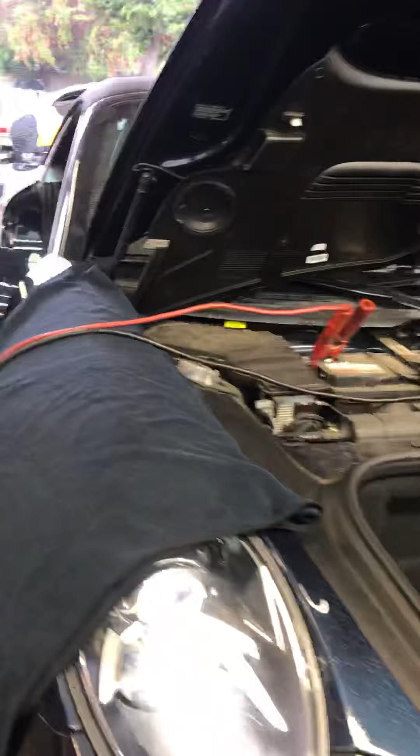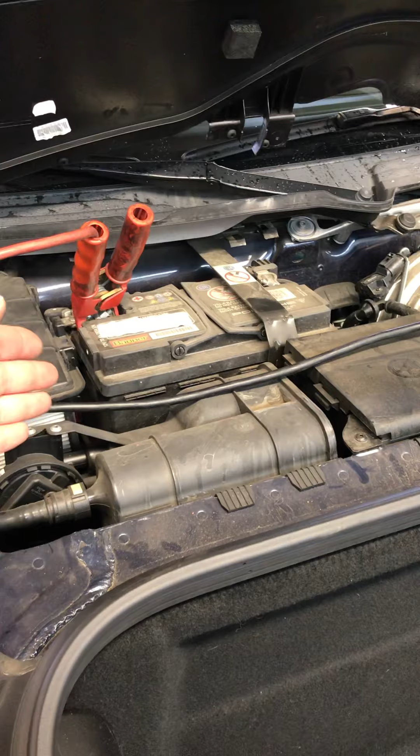We've got an interesting situation today where we have a 2014 991 and we have a check engine light. So the first thing we did is connected the power supply. This is not a battery charger, this is a power supply. And normally I don't worry about connecting it straight to the battery. Porsche says not to on the ground side, so we didn't, but honestly it's not a terrible thing as long

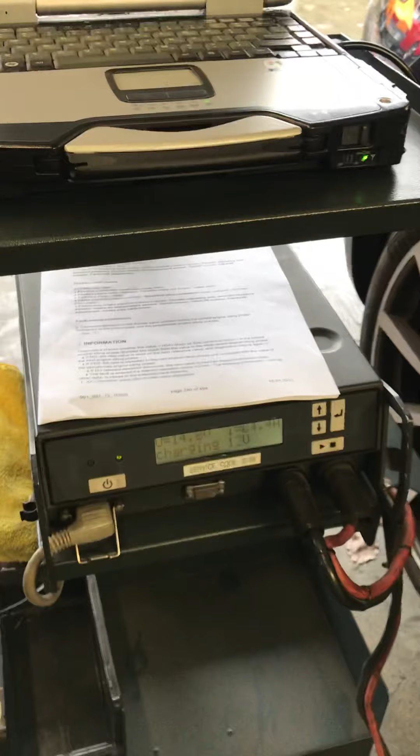as you're careful. We've got our PIWIS 2 connected, and again, the power supply is there because we don't want to put too much AC voltage into the charging system, because computers hate AC voltage. They run off DC voltage. We've got our PIWIS 2 connected and it's going through a vehicle communication interface. Right now you can see that there's no USB light, meaning there's no communication light, but we're going to do that here in a second.

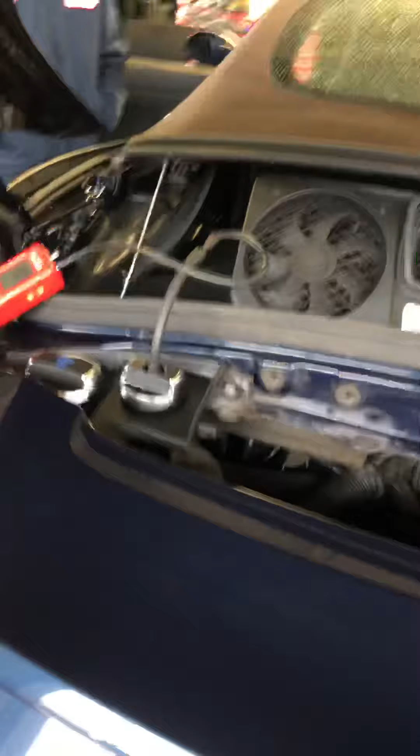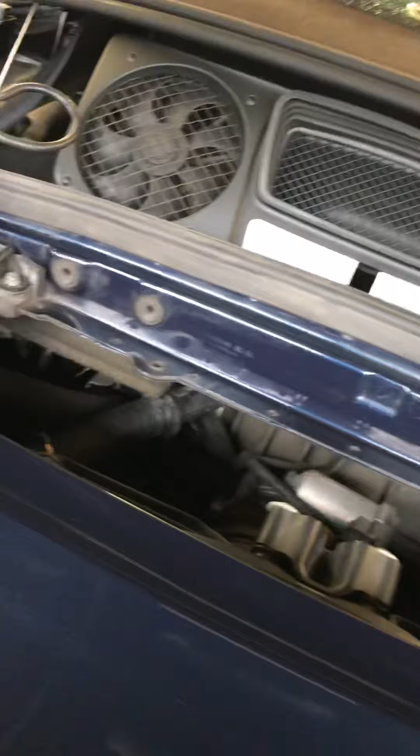There's our standard battery charger. We don't want to use one of those, not clean enough voltage. And I also have a manometer connected, so we're reading the crankcase vacuum. It's actually low, and I think that's part of our problem here. We're going to also check the purge valve, or what's known as the tank vent valve.

So I'm going to go ahead and scan the vehicle. We're going to go into 911. We're going to 991 because this is a 991, and it's going to communicate, and eventually if it's communicating we will get the USB light, there it goes, to come on. If you don't get that USB light, there's no communication. On the 12 through 15 cars, your connection, your DLC, is right at the fuse panel. So now we're connected to the car.

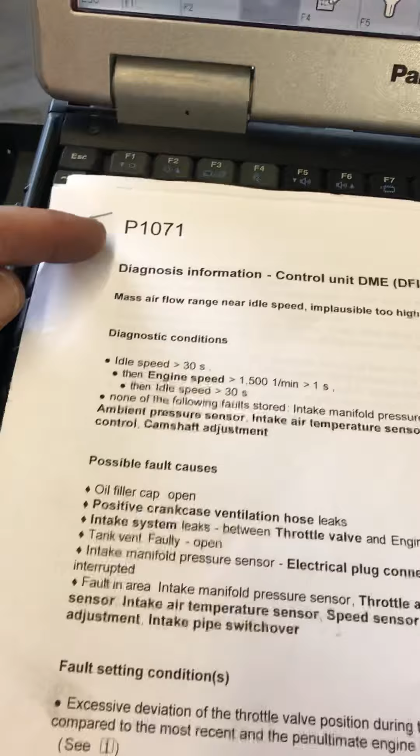I'm going to go in, since we had a check engine light and I reset it yesterday, but I wanted to show you what we were doing. Now, when we have a check engine light or a fault, I like to pull up the guided fault finding data, and that gives us the fault, what the diagnostic conditions are, meaning what it takes to have that fault happen,

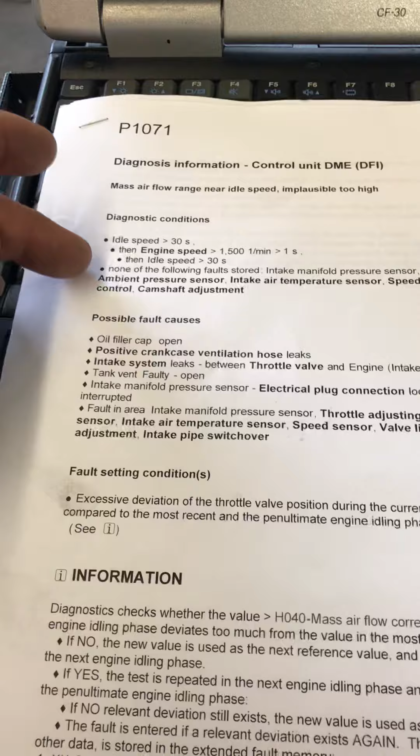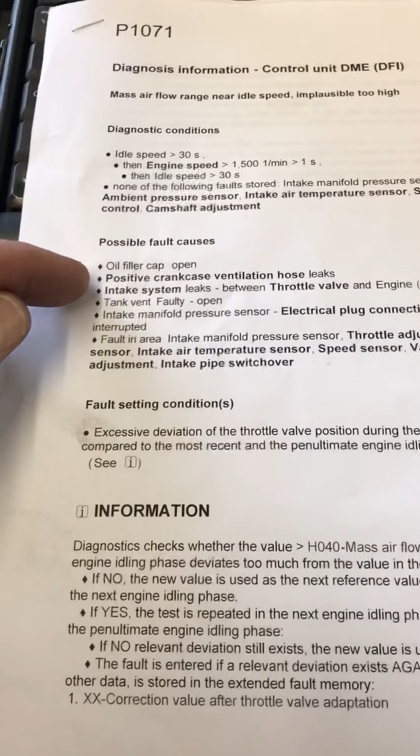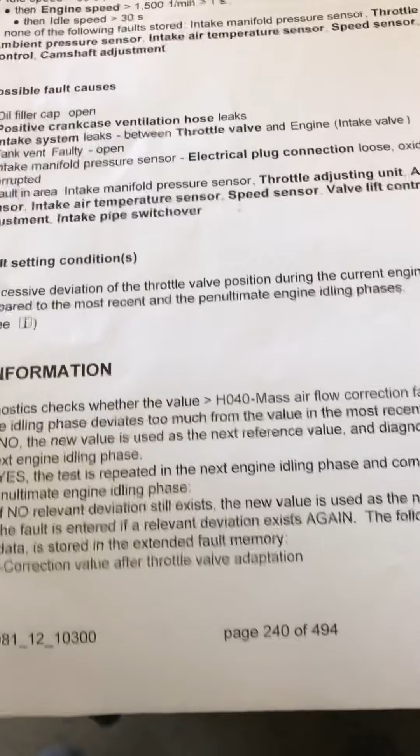then possible fault causes, whether it's the oil filler cap being off, a positive crankcase ventilation leak, which we may have since we have 11 instead of 15 or 16, intake leaks, something going on with the pressure sensor, a fault in the intake manifold pressure sensor, etc. And we don't have any other faults other than this one mainly.

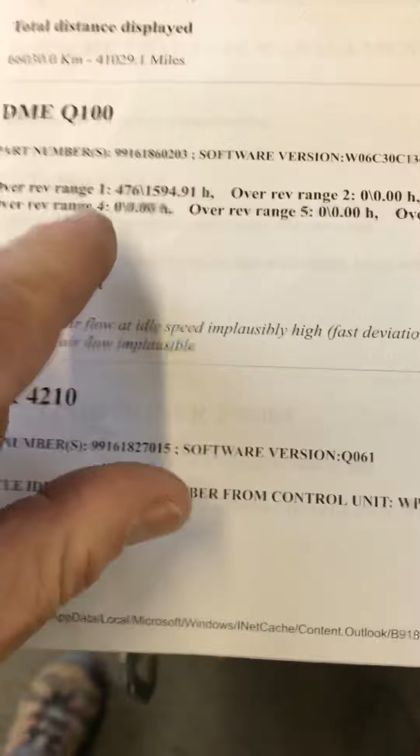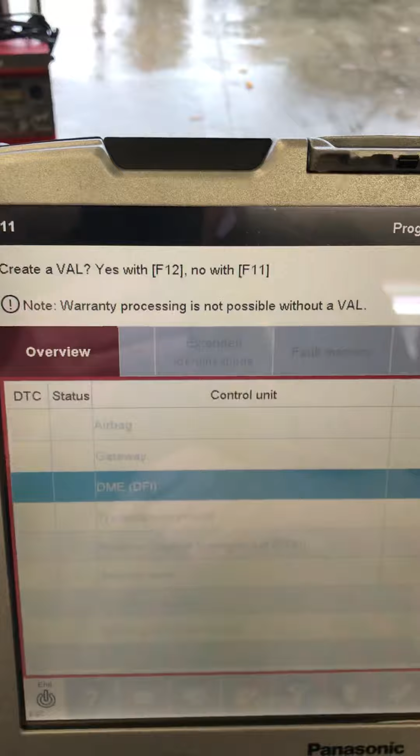Now I'm going to go ahead and go in to DME. I'm going to hit continue, and we don't want to create a vehicle analysis log because that would be about 100 pages and we don't want to wait on the video for 20 minutes. I'm going to go ahead and check our tank vent valve here in a minute. Look, there are campaigns stored for this vehicle. I'm not going to worry about that right now. That would have to go to a dealer to take care of that.

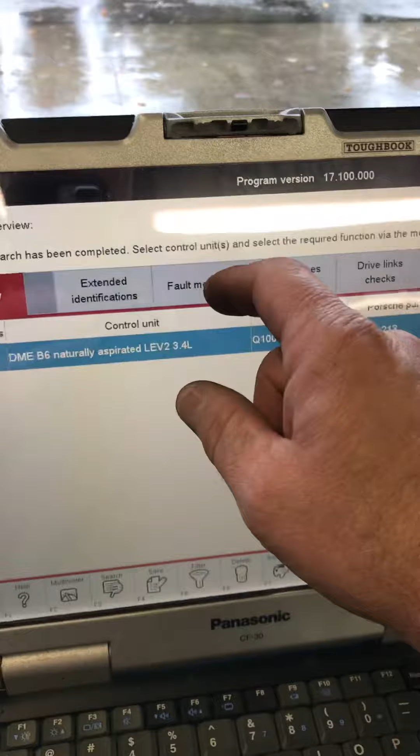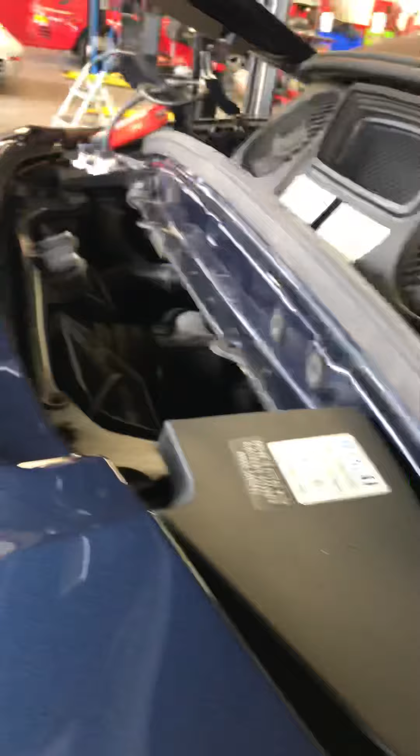And you see what we have now. I've cleared the fault memory, so we shouldn't have any faults at this time. Oh, purge fan. Well, the reason why we have the engine compartment fan is because I have those out of position and unplugged. So, okay, that makes sense. We won't worry about that at this time, but we'll go into actual values and look at some values.

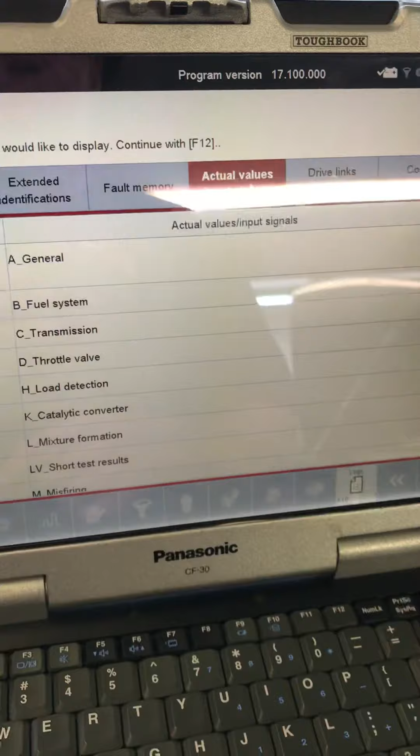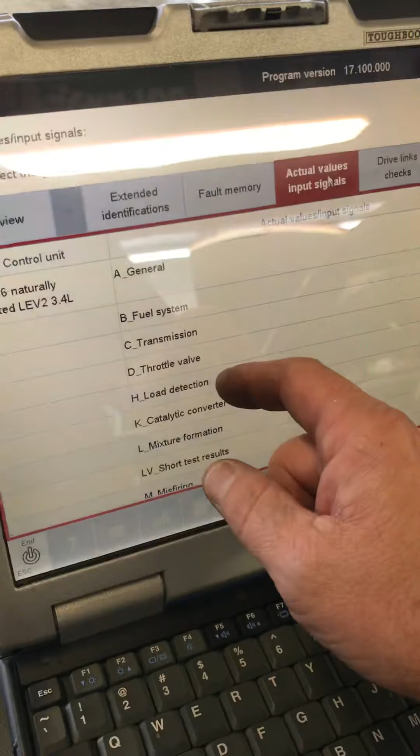So mainly when you're dealing with the intake system and the throttle body, I would say to always go to load detection, H, and in H, actually there's a TI, a technical service bulletin from Porsche, to tell you about this issue and the actual values and where to look and what they mean. So we normally look for H040.

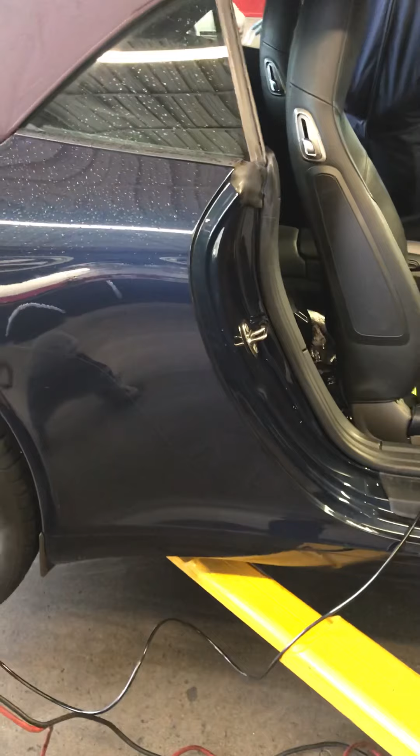So we're going to go in there, we're going to hit continue, and we're going to mainly focus on H040, because that's really the atmosphere in the intake. Now, what they did in the 2012 car, unlike the Panamera, and let me just give you a little correlation first. The Panamera, which came out in 2010, had Smart Key 1. That was a change. The 2011 Cayenne, the 92A, the Smart Key 1. And then the 2012 911, like we're dealing with here. And those cars are different.

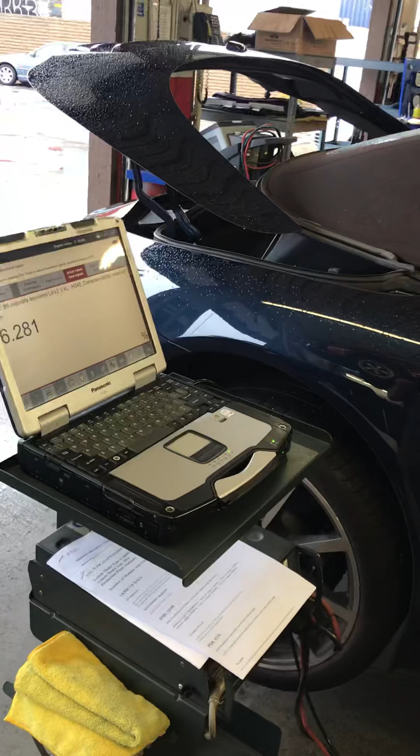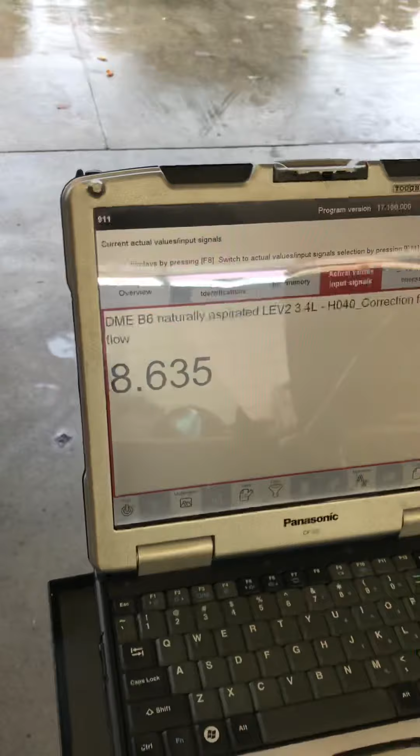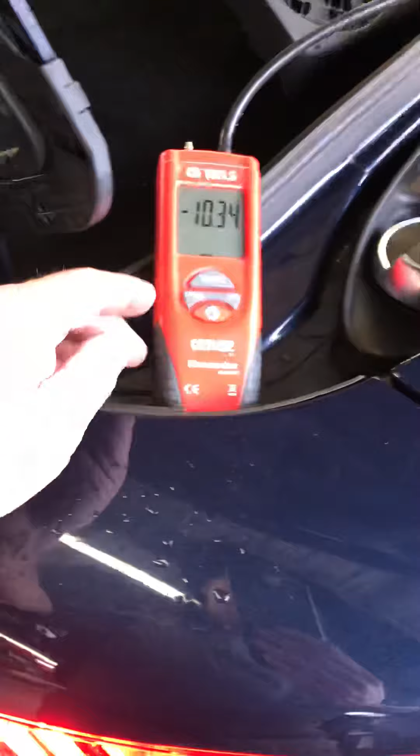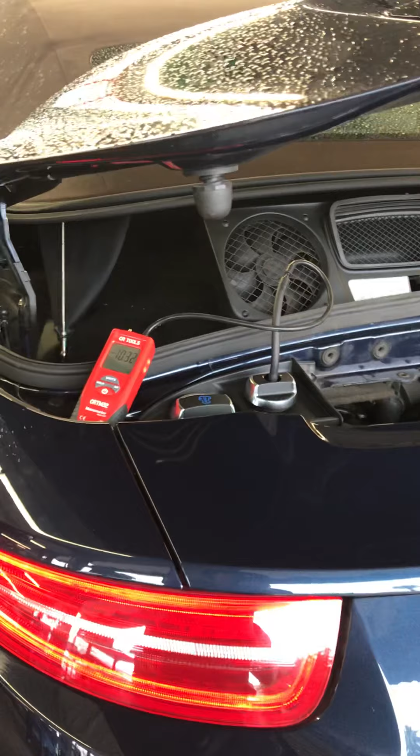Now on the oil cap, we have a manometer connected, and normally we see around 15 inches of water, not a standard vacuum gauge, inches of water instead of inches of mercury. So we now see here 10 to 11. That's low. So I have a feeling something is going on and probably setting this. But what I like to do is clean the throttle body, let the customer drive it, and see if the check engine light comes back on, because honestly I hate to spend additional money of the customer for no reason.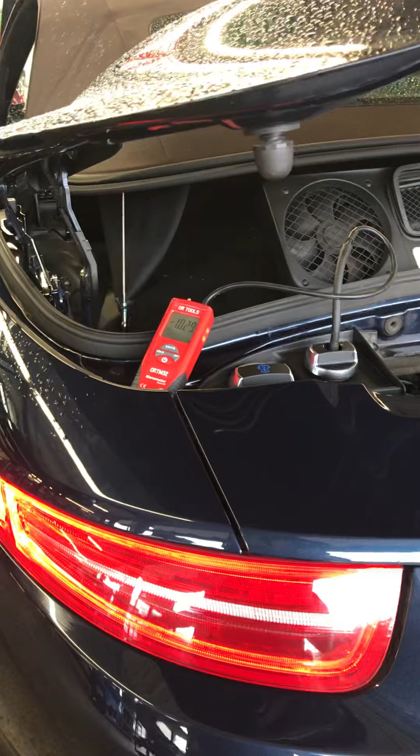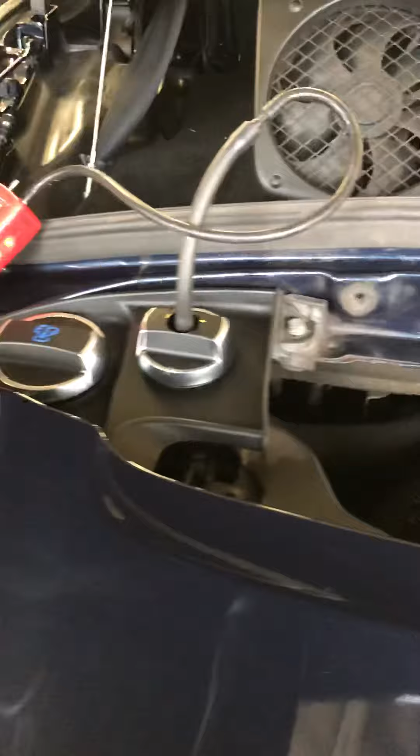Now we did pull off the rear bumper and we did smoke the intake system, so that was critical. Louis is going to grab a flashlight for me really quick, and we're going to show you where the purge valve is, and then I'm going to operate the purge valve through drive links, and you can see the pipe in there is for the purge valve. So what I'm going to do now is Louis is going to turn off the car and we're going to activate the purge valve. So let's back up.

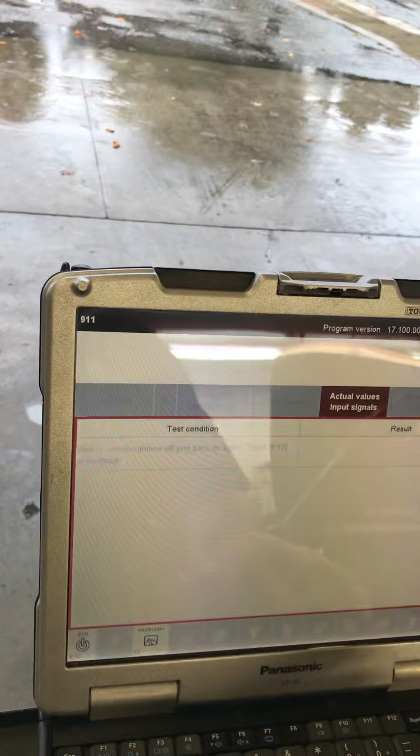Now you see we lost communication. The key's got to be on. So we're going to go back in to activate the purge valve, and the key is on. So give the computer a second to catch up, and we're going to go back in and check the purge valve. This usually takes a moment. The key is back on. We do have communication, I see the USB light is lit up, so that's good.

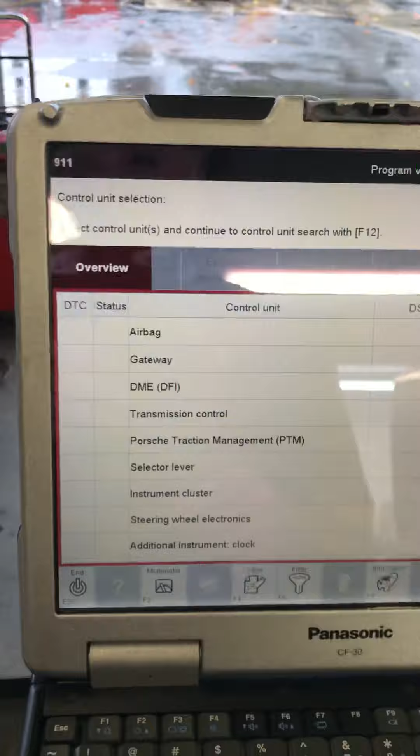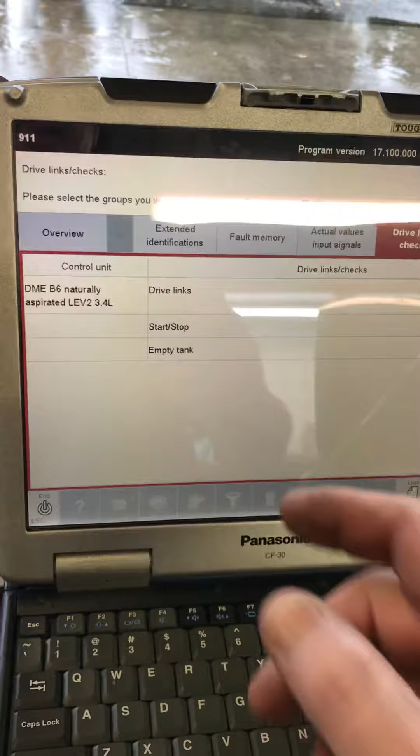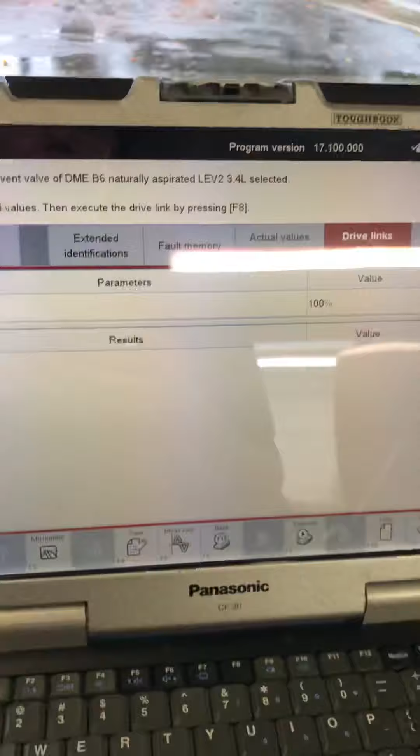And we will continue, and we're going to go into DME, and we're going to go to drive links. Drive links is for if the car is off. Active drive links for if the car is on. So we're going to go back into drive links so we can make this purge valve click. I'm going to scroll down to tank vent valve, same as purge valve, and we'll hit OK. And now what you have to do is you have to hit execute. And once you hit execute, the tank vent valve should be clicking.

So let's listen for that. Okay, I don't hear it right now. We'll try this again. Sometimes you have to do it a couple of times. There we go. And see if it's operating now. There it goes. You can hear it. Very light. Pretty sure you can hear that on the video. Now, you don't just want to run the purge valve for 30 seconds. You want to run the purge valve for 5 minutes. Get it nice and hot, because that purge valve isn't going to act up until it gets nice and hot.

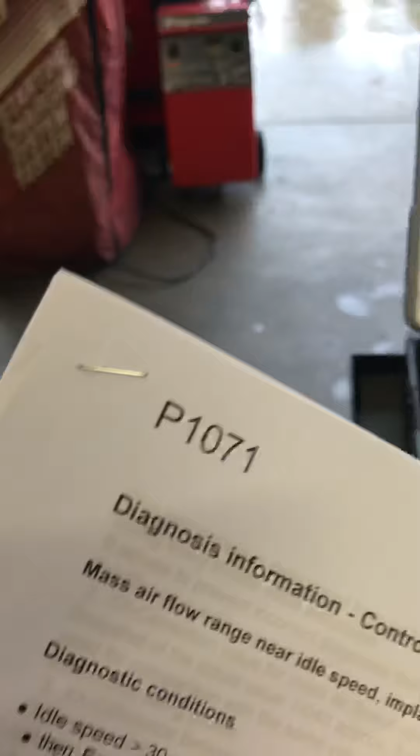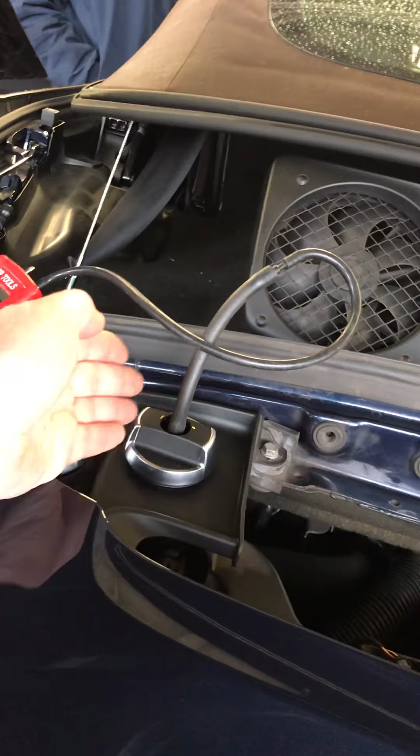Okay, I think we've covered most of it. I wanted to show you how we look for a P1071 fault and how we can deal with Porsche check engine lights. Obviously there's more. Again, we've scanned the car, we pulled the fault, we smoked the intake system, we ran a manometer test, crankcase vacuum, and we've checked the purge valve. And there's more. You can make sure that your oil cap seal, obviously this is not the oil cap for the customer, but we make sure that seal's okay. And then we make sure all of the crankcase breather hoses and that whole system is okay.